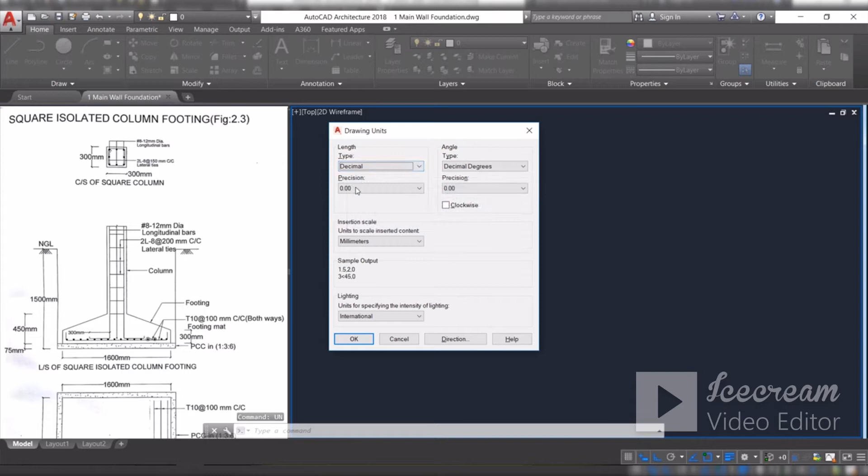To learn how to draw the square isolated column footing. First, set the units. UN, enter. Take type as decimal, precision as 0.00 and unit as millimeters. Click OK. At first, we are going to draw cross section of the square column. The column size is 300 by 300 and let us take the clear cover as 40 mm.

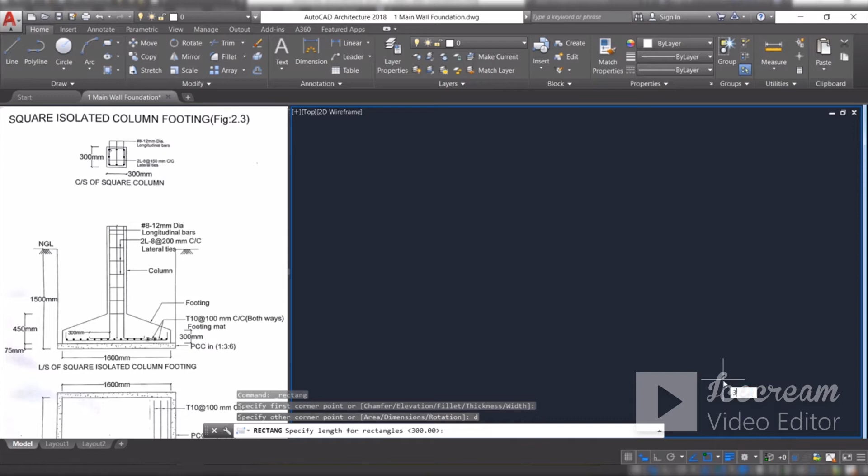So take rectangle, click, D enter, size is 300 by 300, click, then take an offset command, provide an offset of 40, enter, click this object and click inside, escape, then take the fillet command and provide the radius as 12, select polyline and click on this inside rectangle. Now select the circle command and draw a circle here with the radius 12.

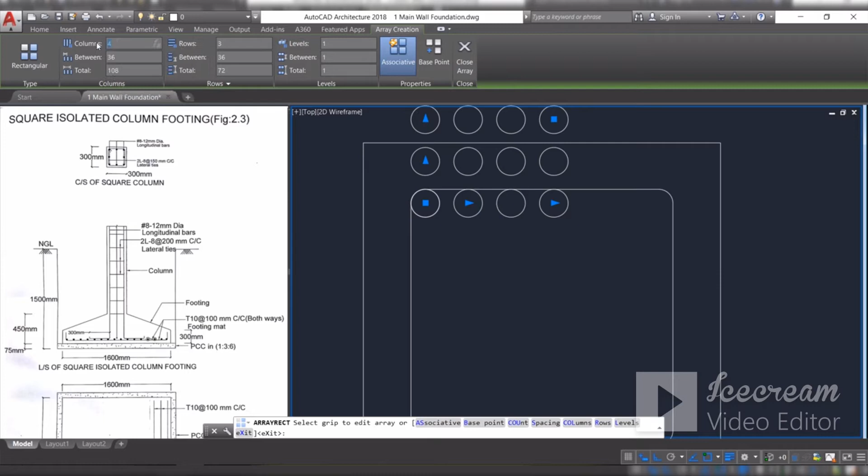Next select the circle and click on the rectangular array. Here provide 3 rows and 3 columns. So here it is 4, so change it to 3. Enter. Now pick this point and move towards the midpoint of this line. Click here. Pick this point and move towards the midpoint of this line. Click, escape, then select this thing and explode it by X, enter, then select the mid circle and delete it.

Once it is over, now select the line, draw a line here from here to here. Next, draw a horizontal line of length 25 mm at the top, then draw a horizontal line of 25 mm at the bottom, escape, then select these 3 lines by window selection, then click on rotate, click on this midpoint as the base point and give an angle of -45 degree, then select this line and delete it. This concludes the cross section of the square column.

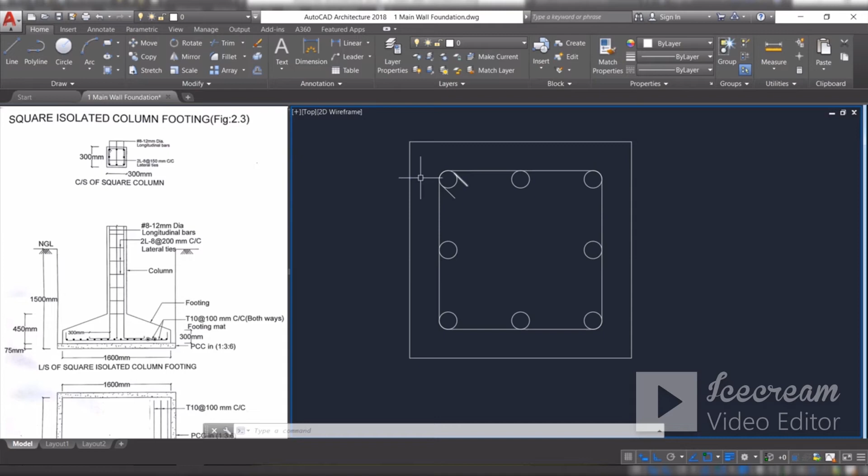Now let us focus on the longitudinal section of square isolated column footing. Now I will start from the bottom. Here PCC is provided. This dimension is 1600 plus projection of 100 this side and projection of 100 this side. Totally it is 1800. Depth is 75. Now let us go here. Okay.

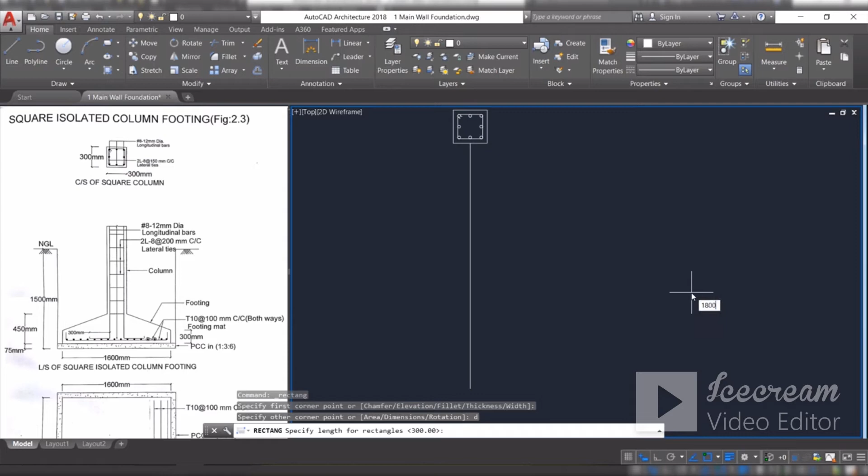Now select a line and draw a center line from this midpoint. Then escape. Select the rectangle command. Click, D enter and provide length as 1800 and depth as 75 mm. Click, select this rectangle and move it with this as the base point. Move it and bring it here. Then select this rectangle and explode it, X, enter.

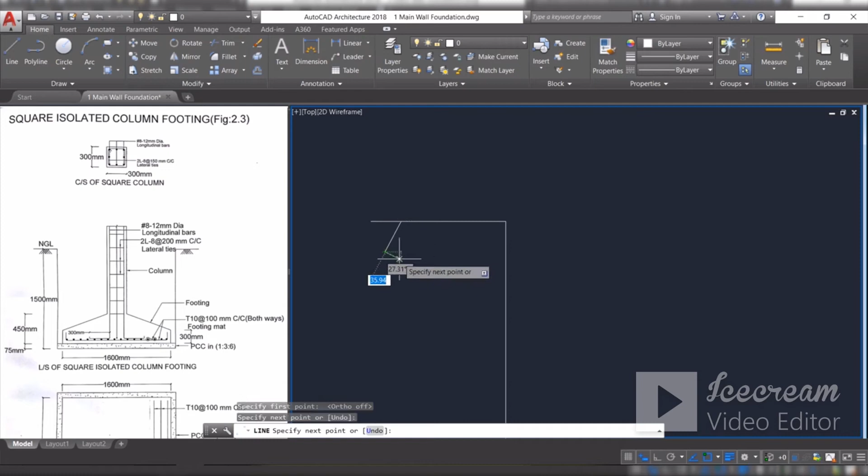Then take the trim command, right click, trim it off, then remove this object, then take the line option, from the bottom click here and provide a length of 1500, click. Now horizontal length of 300, escape. Now select the line option and draw an inclined line here, escape, then select it and click on copy, and provide some 3 to 4 lines, escape, select it, click on the mirror, select the second point and click,

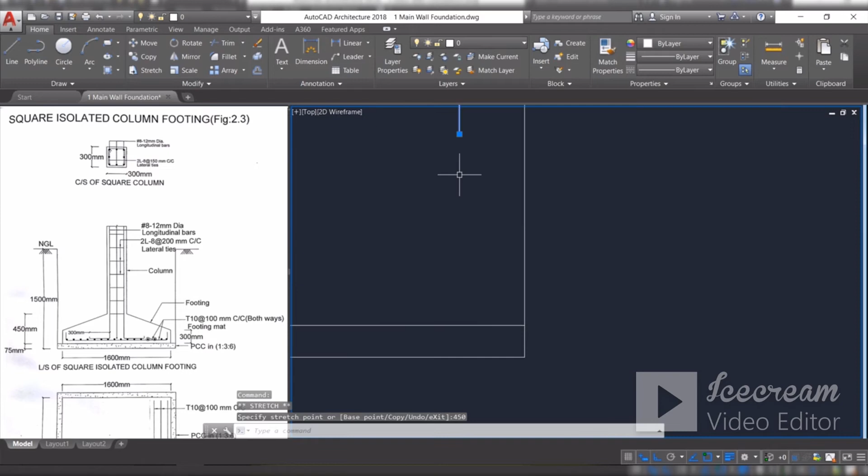enter. Now take the line option, here provide a projection of 100 mm, then upward length of 300, escape, then press again spacebar. From here draw one line up to here. Next select this line and click this point and reduce the length by 450 mm, 450, enter. Then take the line option and join these 2 lines,

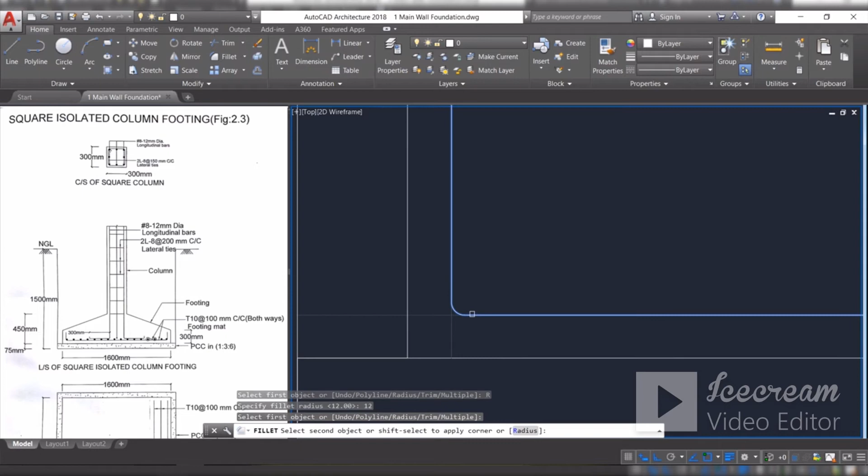escape. Then take the offset option, provide an offset of 40 mm. Select this line, click here, select this line and click here, escape. Then take the fillet command and provide a radius of 12 mm, enter, and click this line and click this line, select this line and select this point, reduce the length by 100 mm, enter, escape.

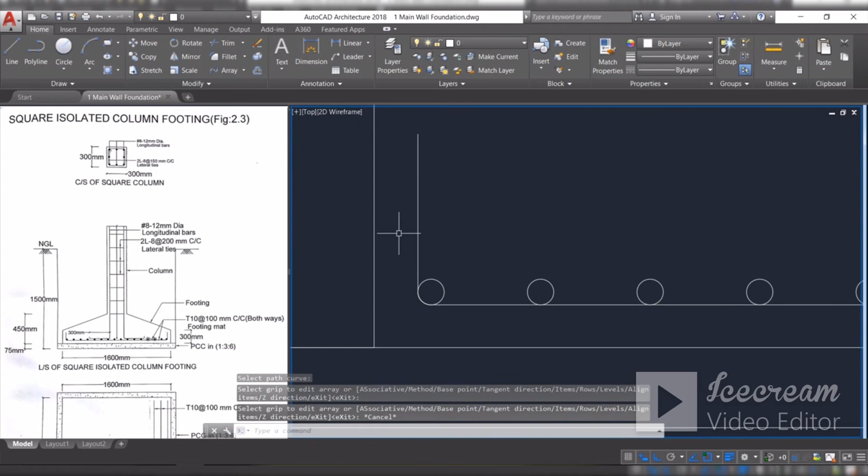Then select the circle command and place it here and draw a circle of radius 12 mm. Select the circle. Here go to the array option, take path array and click on this line and provide a between distance as 100 mm. Enter, escape. Next, take the offset option and provide an offset of 40 mm. Select this line and click here.

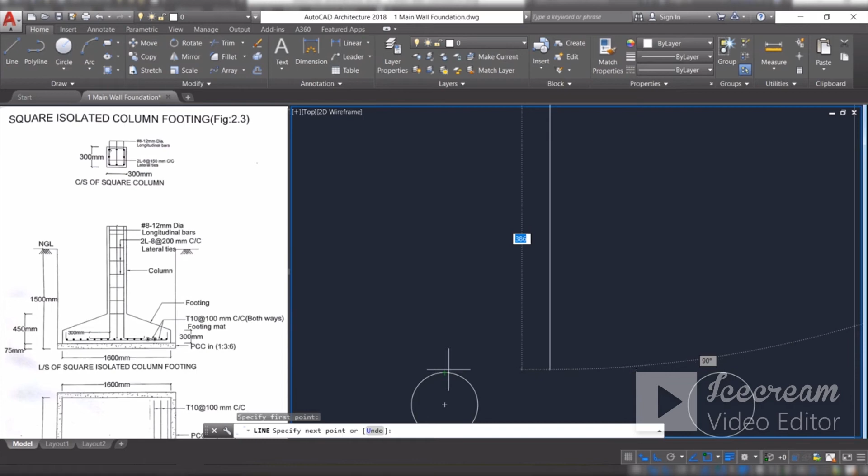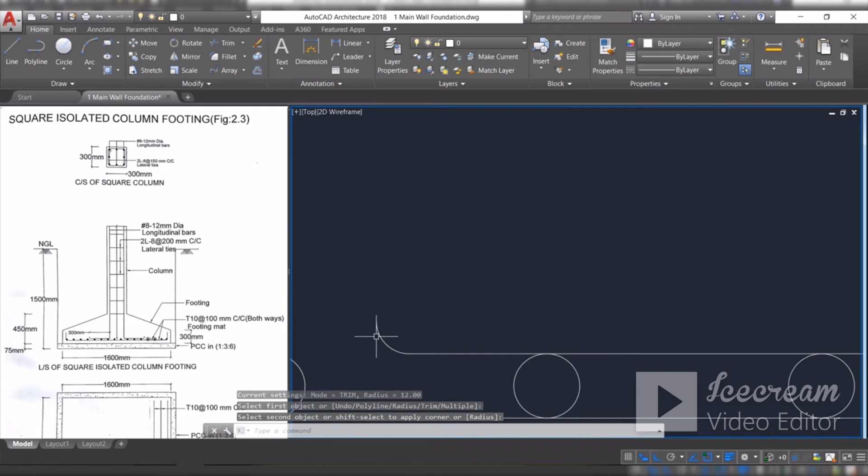Now take the line option, draw a line by taking quadrant as the tracking point. Okay, and provide this side length as 300 and upside length as 12 mm. Enter, escape. Then take fillet option and click on this line, click on this line, again press space bar, click this point and click this point. Once it is over, now select this line and move it upwards. Select this quadrant as the tracking point and bring it here. Escape.

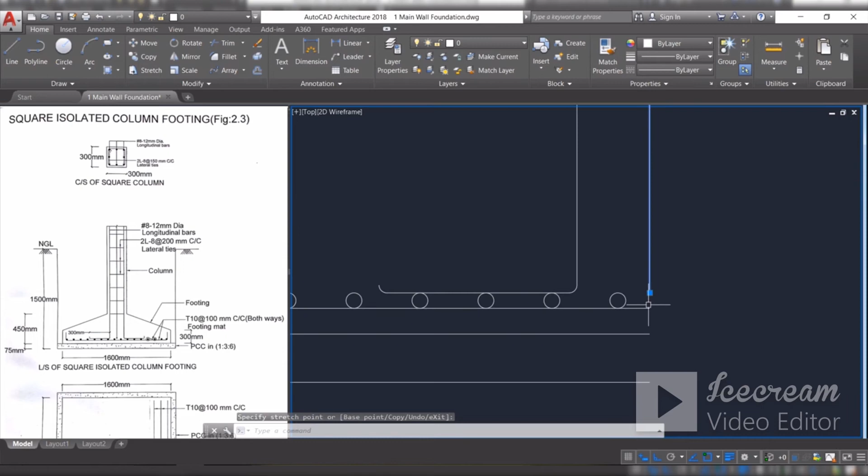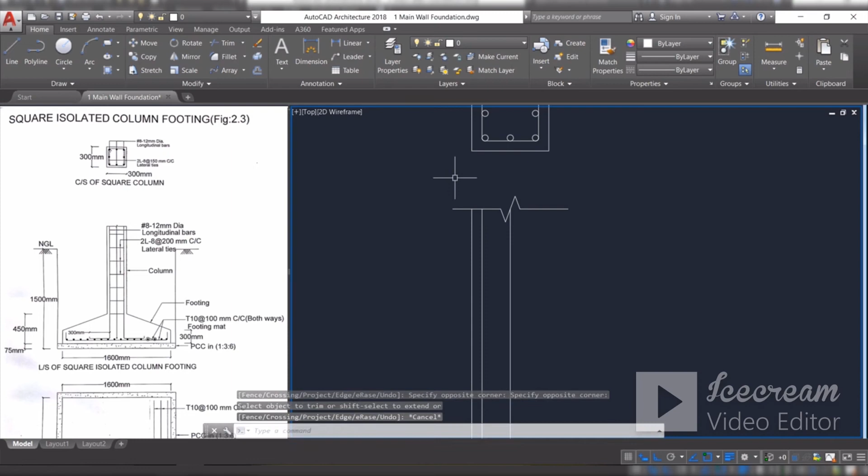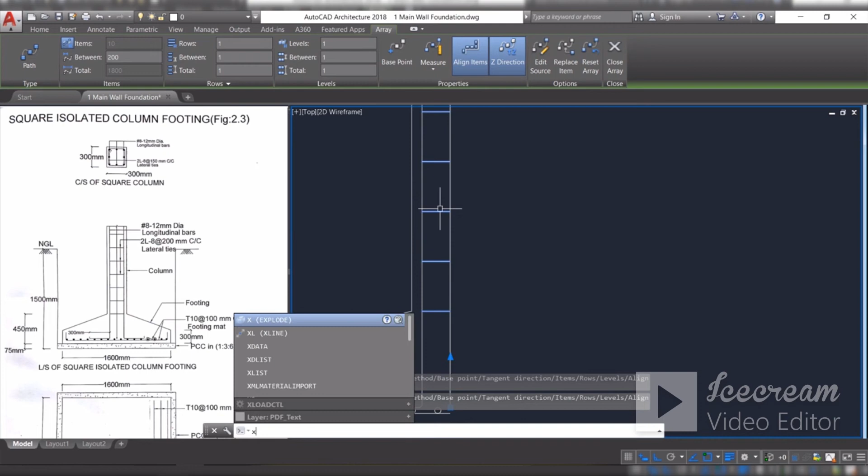Now we need to draw a break line here. So for that type BR, select break line and draw a break line here from here to here. Click enter. Next take the trim command, right click and trim this portion. Escape. Now go to the line option and draw a line here. Escape. Select this line and take the path array and click on this line and provide a between distance as 200 for stirrups. Then close it, select that one, explode it by X, enter. Then remove the unwanted lines here. See here, these are the unwanted lines, delete it.

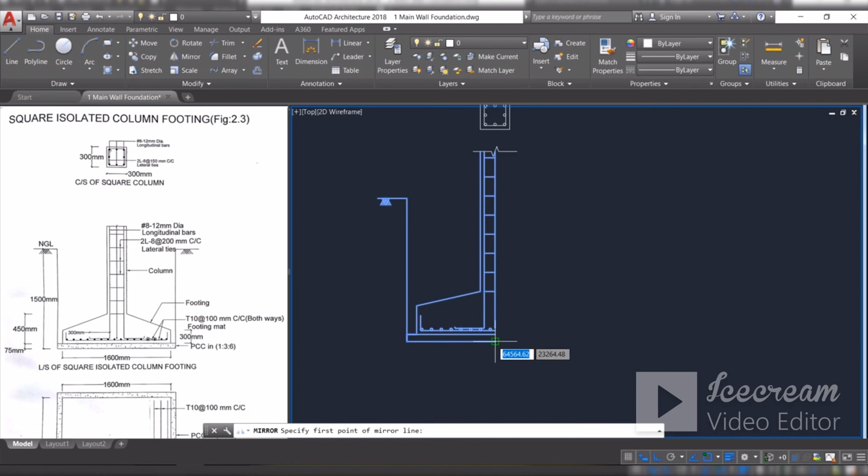Next, once all this is over, select all the things except the break line. Okay, then click on the mirror command and click on this point and bring the cursor below, click enter. Okay, this concludes the longitudinal section of square isolated column footing. Next, we are going to learn how to draw the cross section of the footing here.

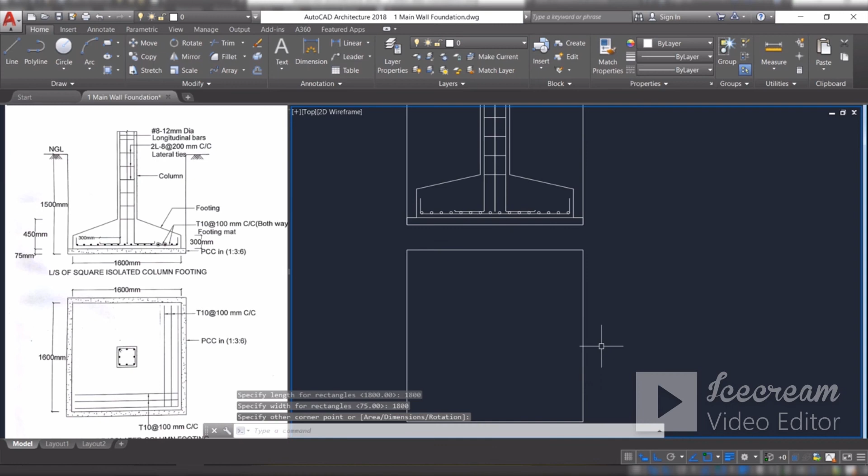Okay, now I will take rectangle option. I will go to this point and I will track it and D enter. The length is 1800 and the width is 1800. Enter, click and select an offset command. Provide an offset of 100. Enter. Click this rectangle and click it inside. Spacebar to cancel the command and again press the spacebar to repeat the same offset command.

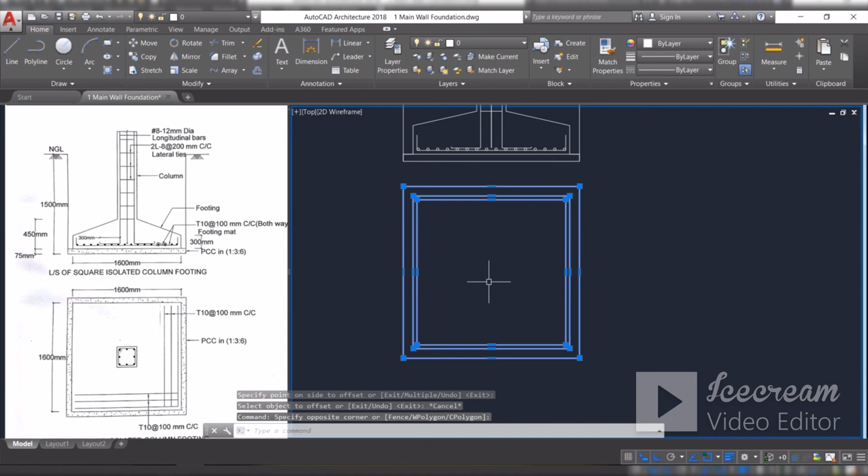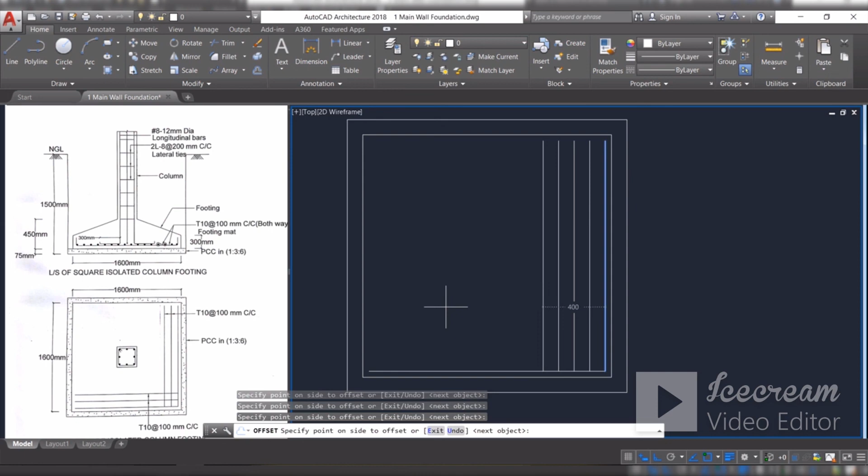Now we need to provide an offset of 40 mm. Take it, select this object and click it inside. Escape. Select all these three lines and explode it by pressing X, enter. Next, select these two lines and delete it. Now go to the offset options. Provide an offset of 100, enter, select the object. Now select the multiple option and click here 3 times. 1, 2, 3, enter. Now select this object and click it upwards.

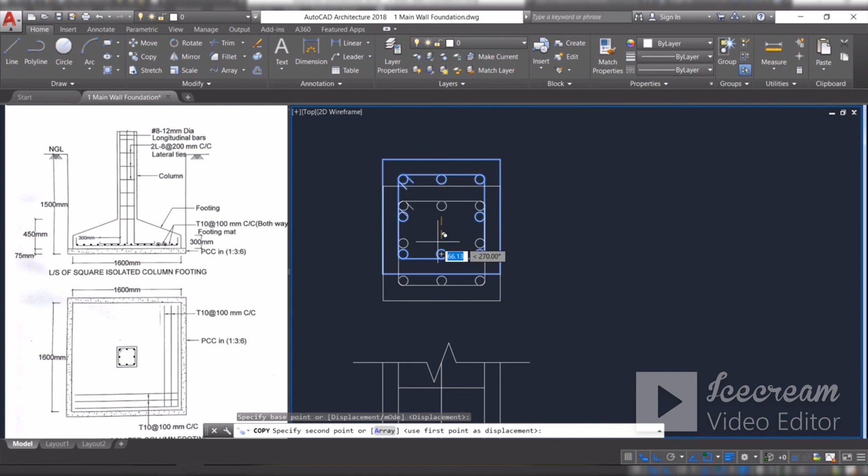1, 2, 3, enter. Now here we need to show the cross section of the column in the footing also. For that I'm going to copy this thing. First select it, press copy. Take the geometric center as the base point and move it below. In this line, search for the midpoint. Okay, once you got the midpoint, drag it, then click it, press escape. Okay, this concludes the cross section of the footing.

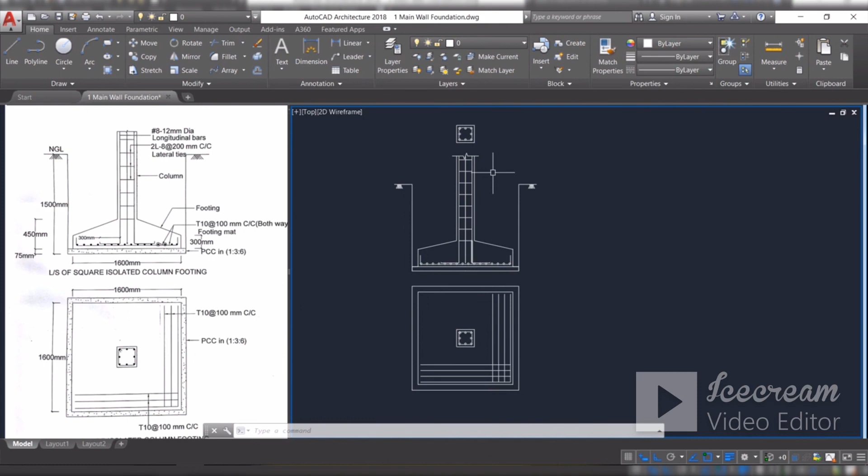So overall, we got cross section of the column, cross section of the footing, and LS of column as well as the footing. Remaining thing is labeling part and dimensioning part.